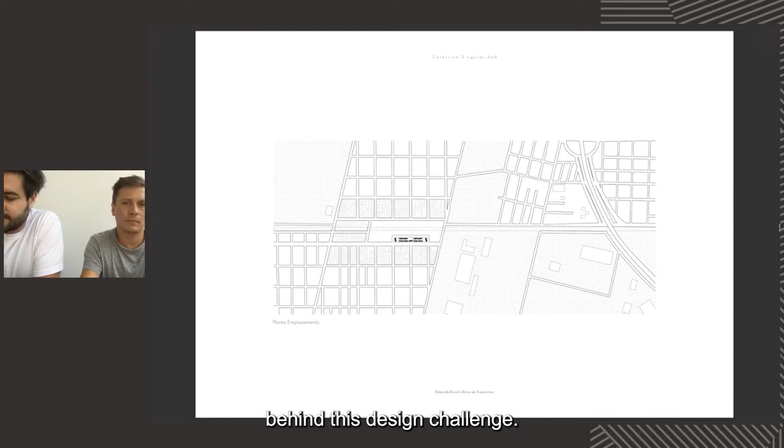To begin with, we consider it important to contextualize the circumstances behind this design challenge. For many years in Argentina, the possibility of obtaining mortgage loans was restricted, and in 2012, the creation of a trust fund called Procrear gave the possibility of access to housing through a loan with a term of 30 or 40 years. Procrear was an initiative that the national government promoted for the delivery of 100,000 mortgage loans to acquire dwellings that were built by the program through urban developments.

The program worked through national competitions, where construction companies, in order to participate, had to make not only an economic offer, but also a design proposal in each urban development. We were hired by a construction company to accomplish a proposal that, on the one hand, would be appealing for national judges, but on the other hand, had to be affordable enough for them to make a competitive offer. In other words, as architects, we were in between government expectations of forward-thinking designs and the company's economic efficiency philosophy.

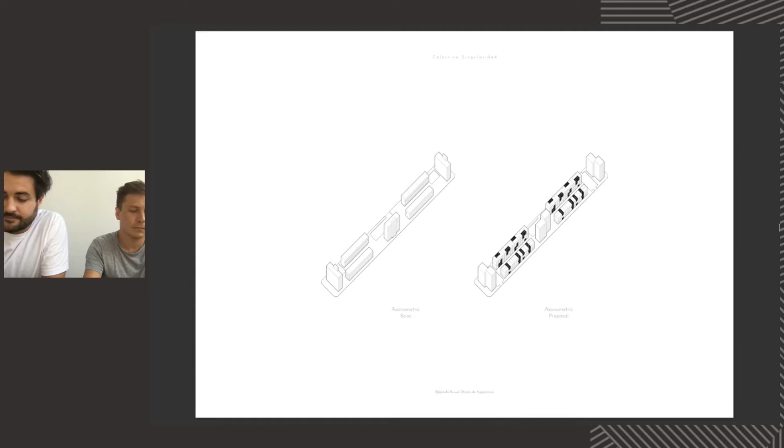Even though designing with a limited budget represented a challenge, the rules of this national contest were a major obstacle. The brief program designed basic sketches that defined a footprint that was not allowed to change. As designers, the possibility of proposing changes was not really clear, and we had to respect the amount of typologies, the units, the square meters, the amount of services such as bathrooms and kitchens, and well, all these matters were mandatory. The Baigorria project consists of 120 units split into 7 buildings.

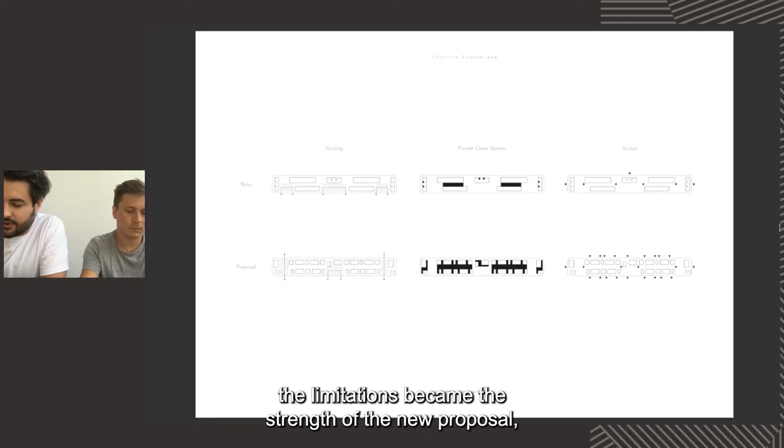From the beginning of the designing process, the limitations became the strength of the new proposal, and only justified variations were the ones that prevailed. Empty space became the main strategy of intervention. This operation was not necessarily more expensive, but would improve lots of variables taken into account in the design of each building. Perforation of the volumes would not only improve the space quality of the buildings, but also its relationship with the street. In a country such as Argentina, security considerations are always taken into account in the design process.

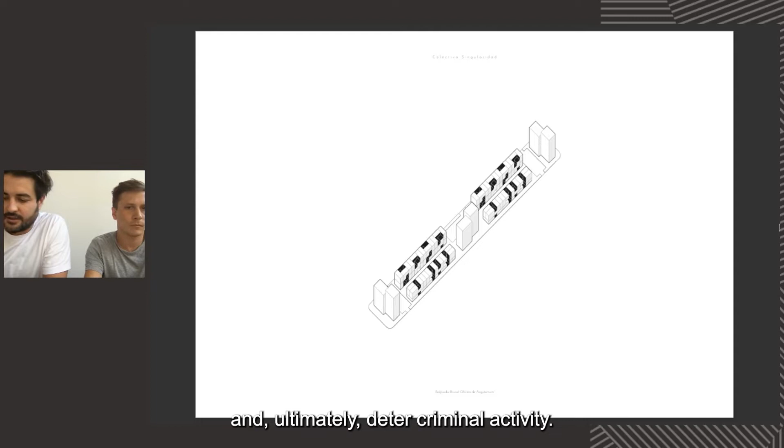In this case, by increasing the amount of entrances to the building compared to the brief base, the relationship with the street improved, as well as the neighborhood's security. These features allow residents to establish control over their private and community property and ultimately deter criminal activity.

The whole project is divided into 3 families of buildings. This includes ground floor plus 3-story building, ground floor plus 2 levels, and ground floor plus 7 levels. Each building was originally defined schematically in the brief base. Problems were identified in each building provided by the brief, but overcoming these mistakes became the starting point of our design proposal.

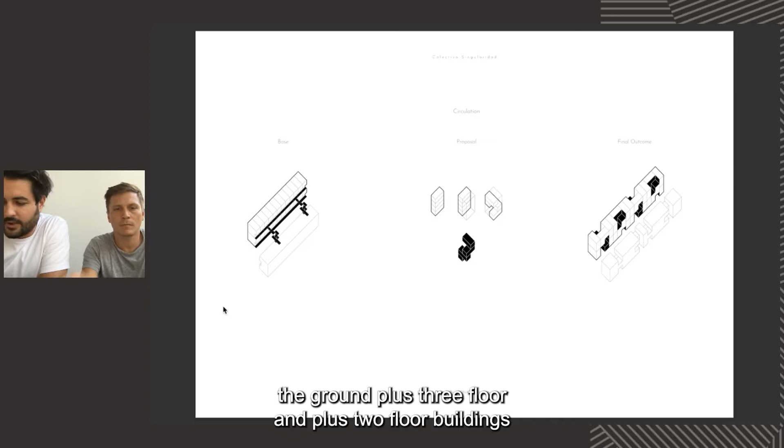In the lower buildings, the ground plus 3 floor and plus 2 floor buildings were identified. We identified the circulation as extremely inefficient. The distance from the main entrance to each unit was unacceptable for us.

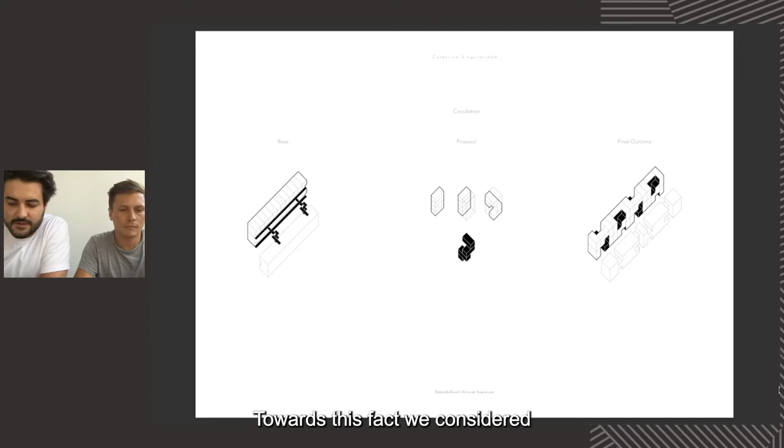In addition, the whole volume was combined with one duplex unit on top of another. This composition represented a contradiction, because we were supposed to provide a building with diversity of dwellings. In other words, the original conformation of the volume was the result of repeating the same unit.

Towards this fact, we considered that the diversity of apartments was essential, providing future inhabitants a sense of belonging and promoting individualism. This was ambitious, since every unit was supposed to have the same square meters and facilities. Facing this challenge, we concluded that by adding empty space volumes, different units with the same square meters could be created, completed through the circulations.

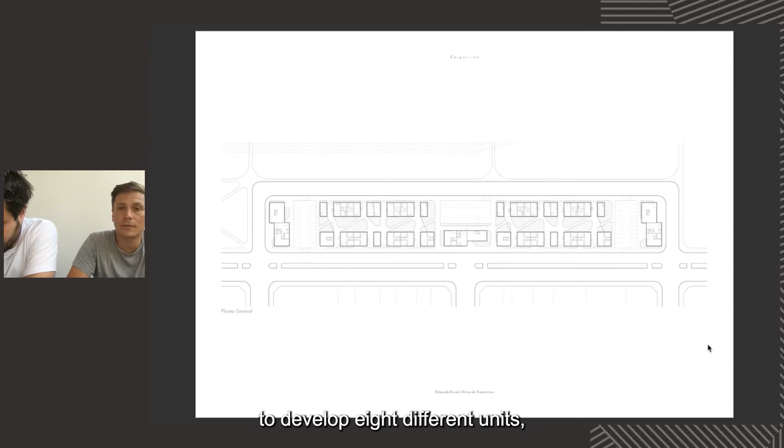This operation added a cross duplex as an alternative. Another variation in distribution was locating bedrooms sometimes on top and sometimes at entrance levels. This way, the proposal manages to develop 8 different units, compared to the only one given by the brief.

Another design strategy was paying special attention to the circulation stages. Open space was carefully thought out, gradually changing its scale along the way through the complex. A private exterior space was also provided in every unit.

In addition to this strategy, rational solutions were proposed to make the construction process more efficient. Every decision was thought out to be affordable. An example is the use of the same frame window for the whole intervention, as well as a module structure.

The open circulation was thought out to work as a common exterior space, where neighbors were expected to socialize and appropriate for their own personal use. We believe this kind of space makes the building breathe and provides extra exterior space for the unit, which is essentially small in terms of square meters.

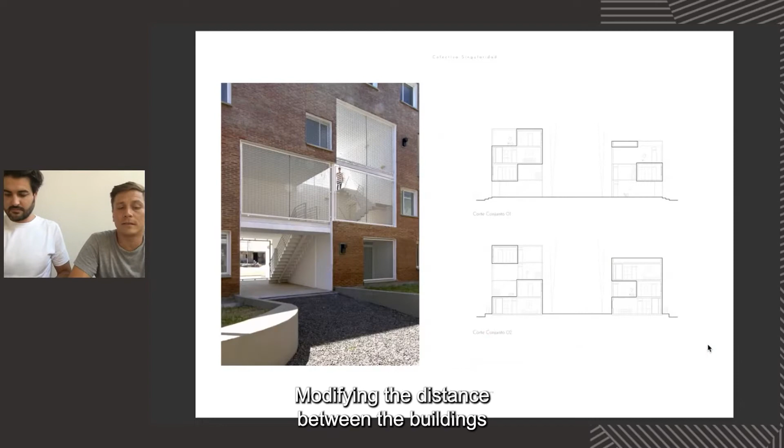Modifying the distance between the buildings was not allowed, but the perforations where the circulations take place make the central garden healthier in terms of illumination, ventilation and contact with the streets. Cross ventilation was also taken into account in the design of each unit. Each and every unit has it.

As Tomás said, kitchens and bathrooms are also the same in every unit, to make construction affordable. All of these design decisions had a great impact on reducing costs.

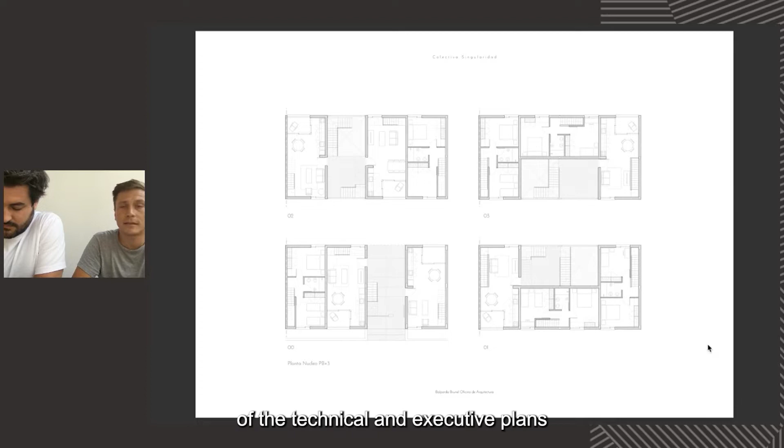Moreover, the whole building is completed by the repetition of the first 4 modules. This also made the development of the technical and executive plans more efficient.

Finally, the ground plus 7 floor building's original volume is wide and not high enough, so the plan is broken and shifted in order to improve the perspectives. The main challenge was to work this typology, embracing some of the solutions provided in the other, lower typologies.

In this case, the empty space was also added and placed in every floor of the circulation. This action improved the common space that generally lacks natural light and sights. The position of the balconies in each dwelling was also switched between floors to provide a wider range of typologies, so we added different types not only in the lower buildings, but also in the ground plus 7 ones.

Ultimately, our intention was to express an architecture which not only favored inhabitants, but also citizens, offering possible urban scenarios, understanding the residential project as the building of urban landscape.

For us, every obstacle, problem, and difficulty faced in the designing process has always been enriching. The idea behind every building has always appeared by trying to fix an apparent problem. Our architecture is proposed to improve not only living conditions in this kind of complex, but also to provide positive solutions to urban landscape surroundings.

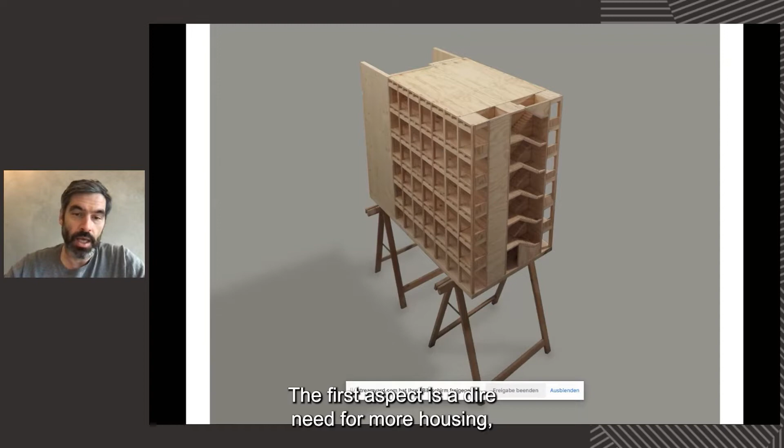And that doesn't come as a coincidence, because what is critical about the project from my perspective is the fact that we're trying to address 2 aspects that characterize the Berlin housing market that seem at first glance irreconcilable. The first aspect is a dire need for more housing, which by definition leads to the need for fast and cheap provision thereof, construction, which in turn implies very likely also serial construction, precast elements, and so on. And on the other hand, we're also facing an ever-widening range of ideas of how we live, how we work, how we share or combine these 2 aspects and facets of life.

And therefore, something that seems intuitively to go against the idea of pre-construction or seriality, which is the idea of a variety of plans, and therefore seems to contradict pre-construction and the uniformity that it seems to imply. This is exactly where that type of construction comes in, that we have appropriated from the world of industrial warehouses.

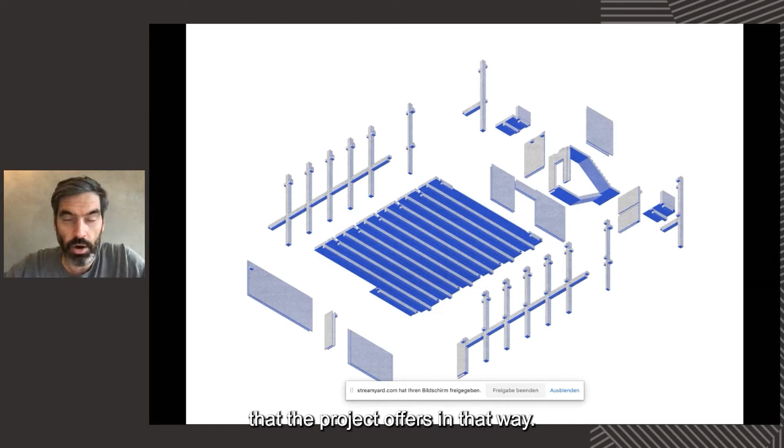So the same floor here in an exploded way, which probably makes it easier to detect the individual elements, columns, again, beams, and in the center of the drawing, the so-called TT ceilings.

I'll show you a couple of images of the construction process, as I do think they offer an idea of actually how it all comes together and what kind of freedoms the project and the way it is constructed offers at the end.

So you see at the very beginning, the first elements that have arrived, where the site of the project is an inner city site in Berlin. We're attaching the building on one side to an existing kind of block condition, the traditional kind of urban morphology of the city. But as you'll see on later images, it does not traditionally close the block, but actually leaves it partially open.

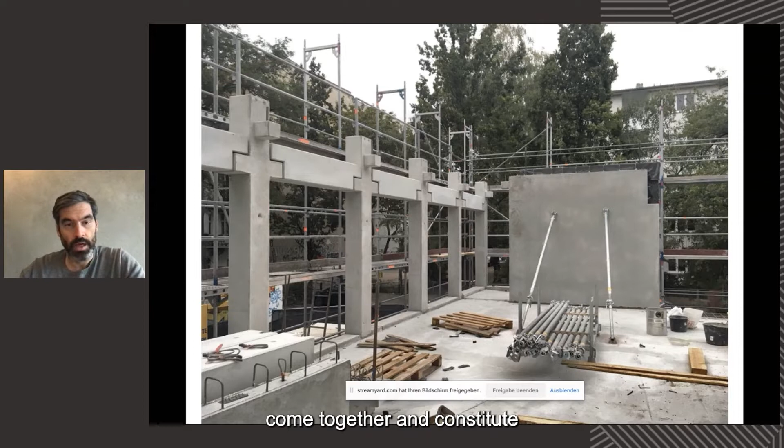What you see here is like somewhere halfway through construction. As I mentioned before, it's a 6-story building. Each floor was built within 1 week in terms of the structure, excluding the skin and the interior, the guts. But you see how these elements that I've introduced a couple of slides before come together and constitute the basic shelf as the Wohnregal, meaning the housing shelf. So we're looking at how these elements actually constitute that major shelf.

Here you see how they come together. And as I mentioned before, these are elements, and this is a construction methodology that's commonly used in industrial construction. The tolerances are bigger, the seams are wider. This is not as you would normally imagine, kind of architecturally, with a capital A, refined kind of structure. So there were a couple of aspects also of making it applicable to the idea of housing.

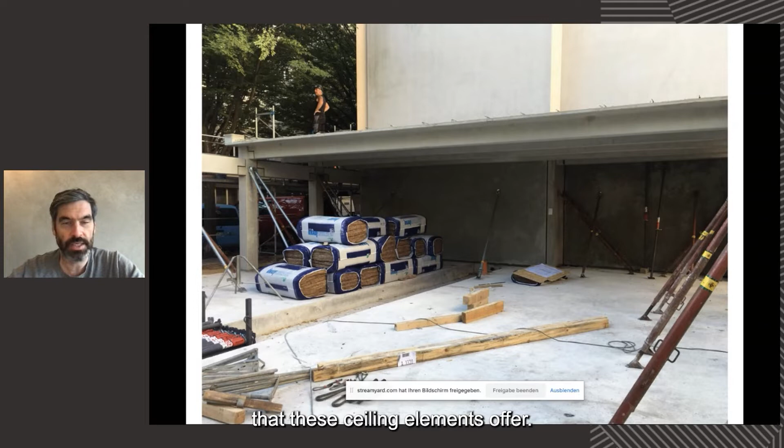I think this image is critical to introduce the idea of the freedom that this shelving, this prefab concrete shelving actually offers, because what comes to sight is the relatively large span that these ceiling elements offer. You can get a sense here in the photograph of the thinness of the actual ceiling itself in the very front, but also the downstands that are implied in these TT ceilings. And what is critical is that there is no structure supporting these ceilings in the interior of the house. So they span from facade to facade.

So that TT ceiling, or pi ceiling as it's called, is made up of a ceiling with two downstands, and those allow, for example in the instance of the Wohnregal, to span for 12 meters roughly, something that is with traditional means of construction not economically feasible. But now that we're able to do that, suddenly we gain a humongous amount of architectural freedom in terms of plans on the inside, because we do not have to align floor plans of the different levels.

So a photo from the factory where these pieces are being made.

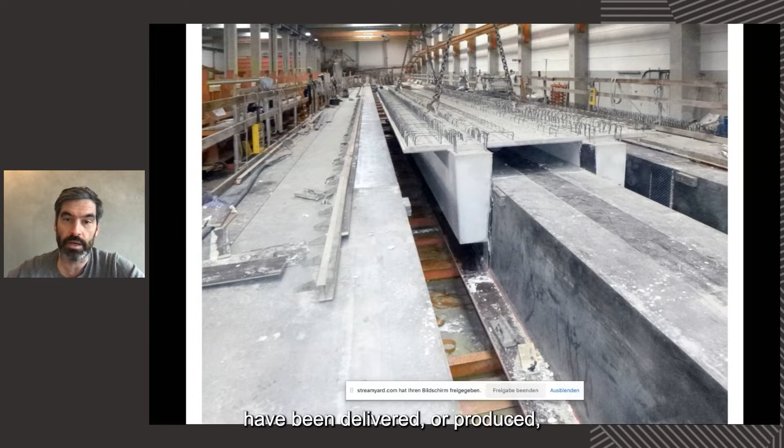It's somewhere in the vicinity of Berlin, an hour and a half from here. Some of these factories in the past have been places where large parts of the prefabrication of East German housing elements were produced, and they've developed onward from that, focusing on different types of pre-construction, like the one we're reappropriating now for housing.

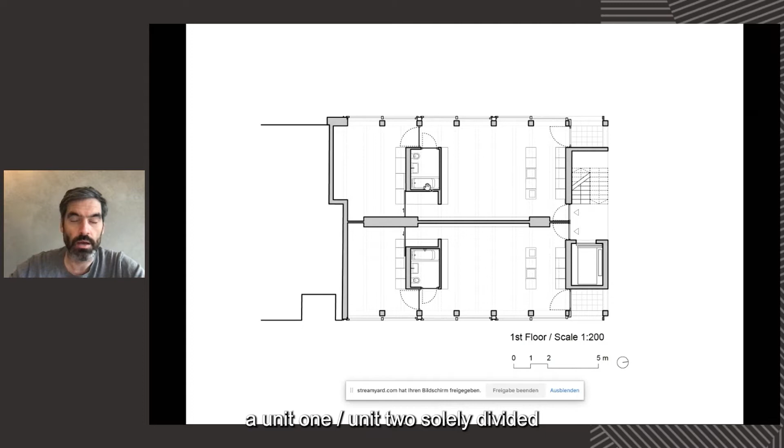So you see one unit which is largely open, almost like a single space plan. Unit 1, Unit 2, solely divided by one core containing a bathroom. On a different floor, one separates bedrooms, a potential second bedroom or workspace. We have one with an uneven division of the floor, with a relatively small studio space where the sleeping area is just separated by a curtain, multiple bedrooms and workspaces in the larger apartments, and yet another with a separate division of a small open plan studio and a relatively large scale open live-work atelier on the top half of the drawing.

The basic orientation is east-west here, so that all units have proper daylighting.

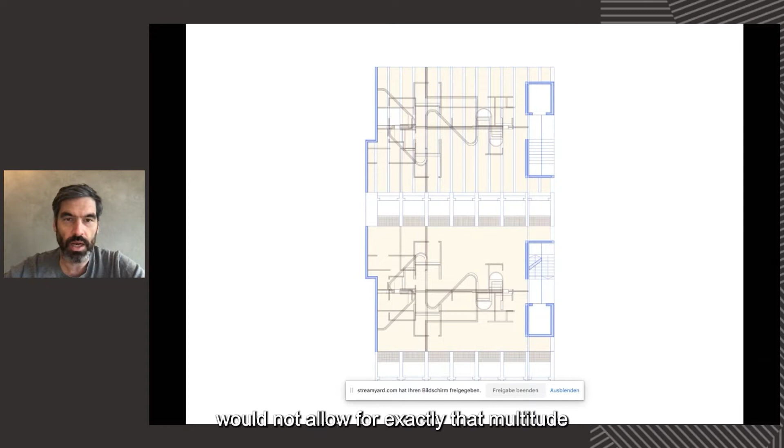Here is, I think, a drawing that is conceptually important for the project. It's an overlay, an unfold of the plan and a reflected ceiling plan on top, but it's an overlay of all the different plans of the different floors. That's something relatively unique to the project, as normally the rationale of building wouldn't allow for that multitude of different plans to be overlaid in that fashion.

I'll continue with a couple of photos to give you an idea of how it appears in built fashion. It is set in Berlin Moabit, an inner city part of Berlin, on a corner lot, taking the front of the block in a way, closing the corner.

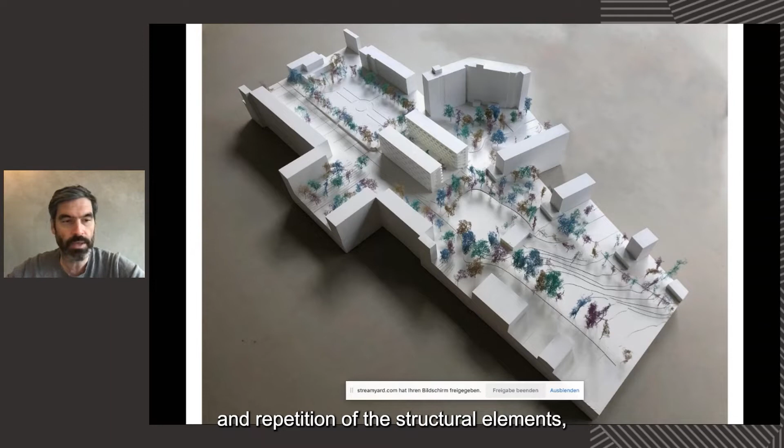What is implied in a serial construction logic is not only this idea of freedom within that building and the repetition of the structural elements, but it's also the repetition on a larger scale, the repetition of an approach that could be replicated on a different site at a different scale, because one should also consider that working in this way requires a lot of investment, not so much financially, but in terms of understanding the intricacies of a construction methodology of that sort. So it is an investment that almost demands that you think in terms of a replication.

So shortly after, or almost before we fully finished the Wohnregal project, we were approached by a German developer, Euroboden, and so we got together in the context of one other project, which has just currently started construction. And the interesting aspect about it is at first glance also the setting.

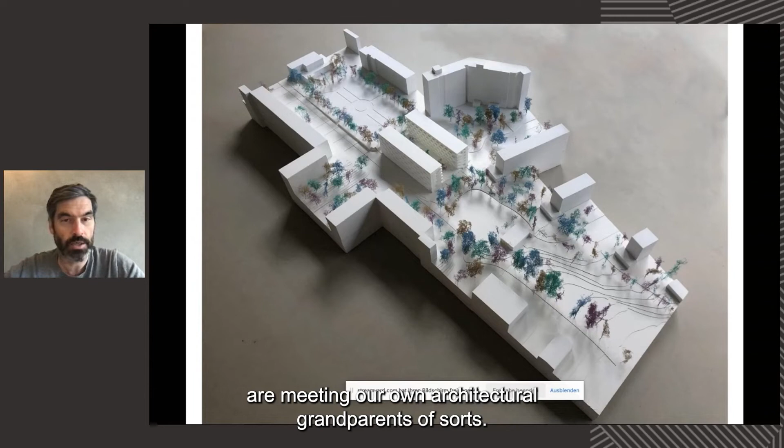The setting is in one of these large 70s, 80s East German housing estates, and they have been known for having been completely prefabricated at the time. So ultimately, in a certain way, one could argue that we, with our building, are meeting our own architectural grandparents of sorts. But that being said, I think it is important to point out not only that there's a historical lineage and a conceptual circle closing,

but at the same time, it's also critical to understand the huge conceptual difference from the historic idea of prefabrication from the 70s, 80s, because that form of prefabrication was built upon a series of wall elements that were stacked, and therefore the seriality would go hand in hand with the uniformity of plan. They were good floor plans, but they were a pure repetition of a few very limited options in terms of plans.

So the skeleton construction that we're not only proposing, but that we've realized and are now in the process of realizing a second time, goes exactly the opposite way, as it combines the idea of seriality with that of a large degree of freedom in terms of different plans and models of living and working.

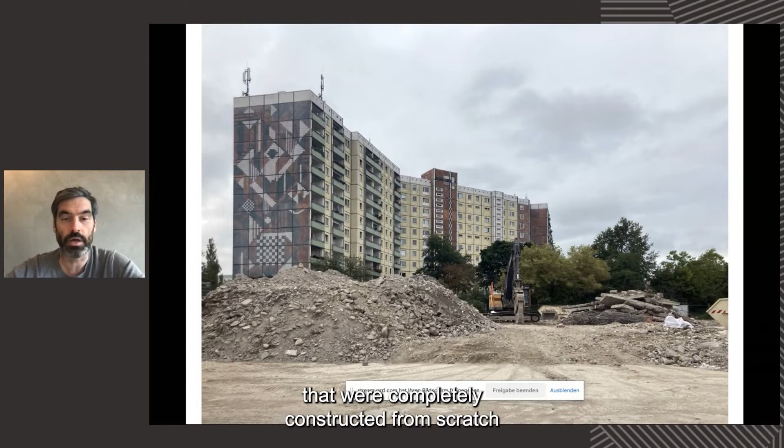So you see the actual site, you see what I just described, the surroundings being characterized by prefab housing, in this case from the early 80s, large scale residential areas that were completely constructed from scratch at that time due to the humongous shortage of housing that they were facing.

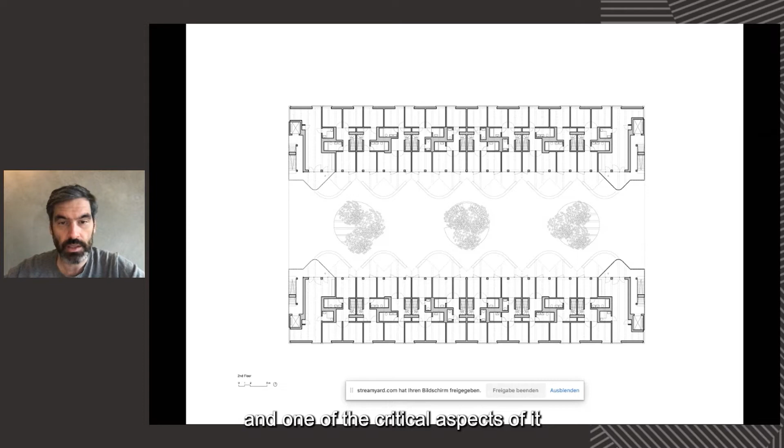Here you see the upper floors and the plan, and one of the critical aspects of it, and that you see in this rendering, is that in front of the facades there's not only the circulation, a type of gallery kind of circulation to enter the flats, but there's also a series of balconies, individual balconies for each of the apartments, and through that wave-like layout, they allow everybody, while being on the balcony, to visually connect outside that housing complex, to look out this way or the opposing way out of it.

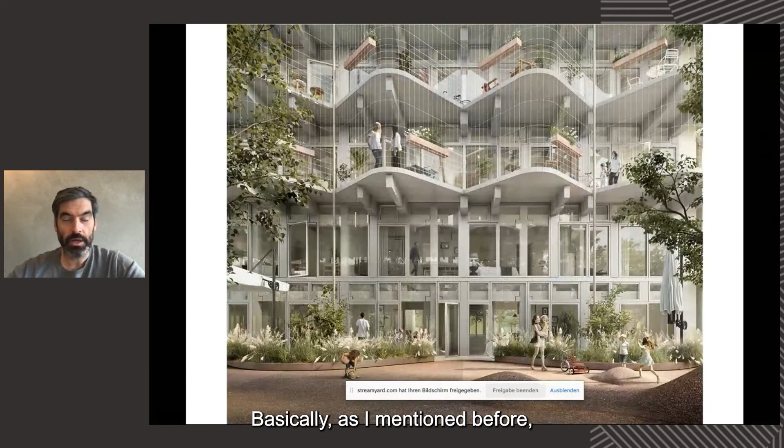So basically, as I mentioned before, this is a continuation in terms of developing the idea of the Wohnregal, various ideas in terms of the flexibility, the construction method, and all of these aspects that are implied in the Wohnregal, to develop them further on a different scale, in a different context. So this one has a little bit more than 120 units of varying scales, and again in a great variety, from two-story family-oriented units to very small scale for singles or people for live-work environments.

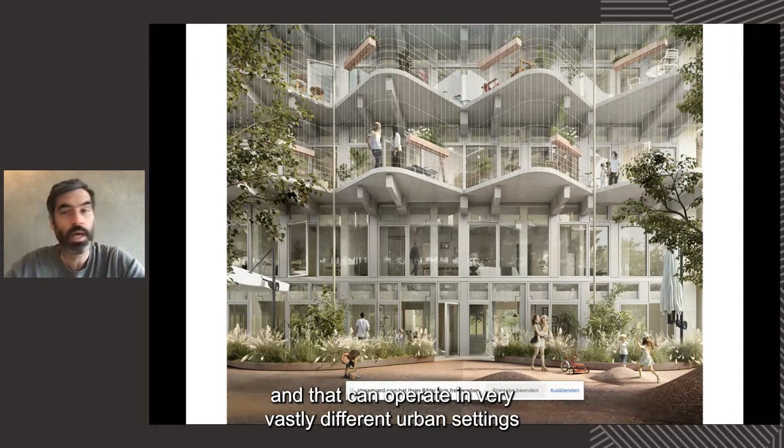So I do think it's, in my eyes, quite interesting to think of that not as a one-off in terms of architecture, but as an approach that can be developed further and that can operate in vastly different urban settings and on varying scales.

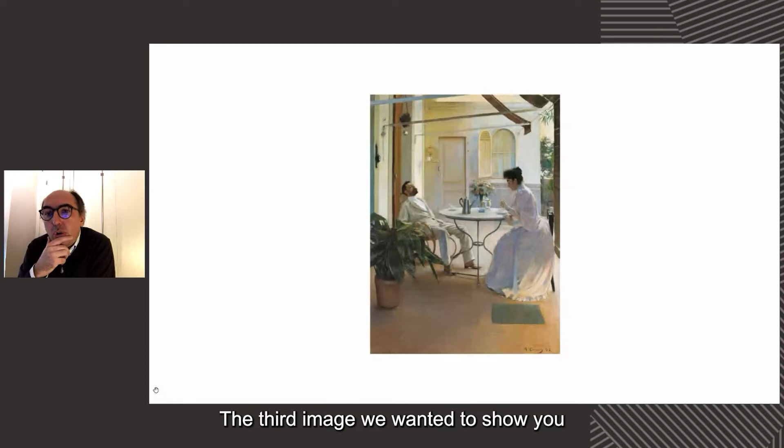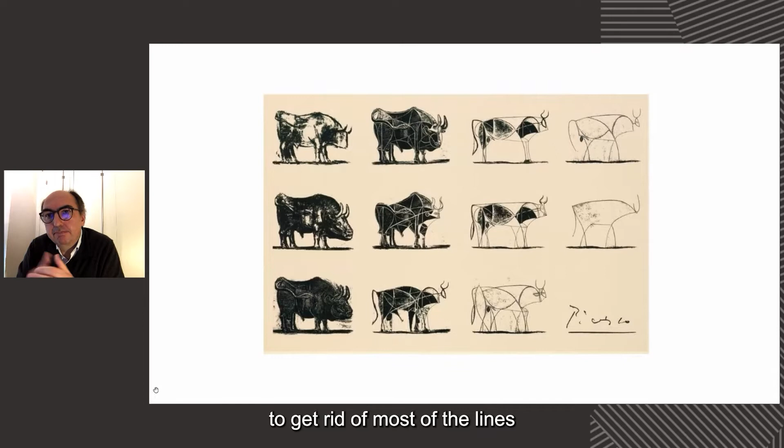The fourth image we wanted to show you is this image by Pablo Picasso that you might probably know, and it's now related to the design process. In these bull engravings, Pablo Picasso went through a process of, we could say, simplification, distillation in a way, decantation, in which he was able to get rid of most of the lines and to understand which were the fundamental lines that could explain the bull itself, the whole animal, with the minimum material.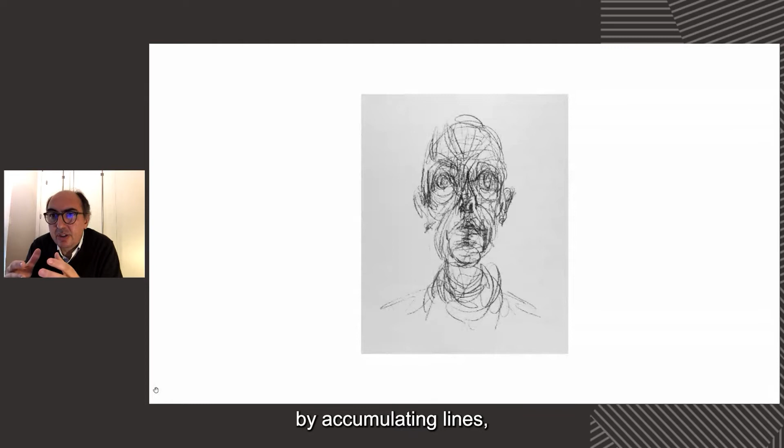So this process is of accumulating lots of lines, lots of data, lots of different materials and topics that somehow enrich the process and are at the end embedded in the final solution. This kind of portrait in which, by accumulating lines, trying to find the right one, the portrait just shows up, or it appears as a revelation of the most probable line after all the iterations.

This is also something related to the uses of architecture. We give a single answer to a problem that afterwards should be also adaptable to new conditions. So many different things should happen in the same place at the same time.

Finally, the sixth image of the 6x6 block that we would like to introduce is this contemporary artist that you will probably also know, which is Banksy. It's related to climate change, of course, and to our responsibility as architects related to the carbon footprint of our activity.

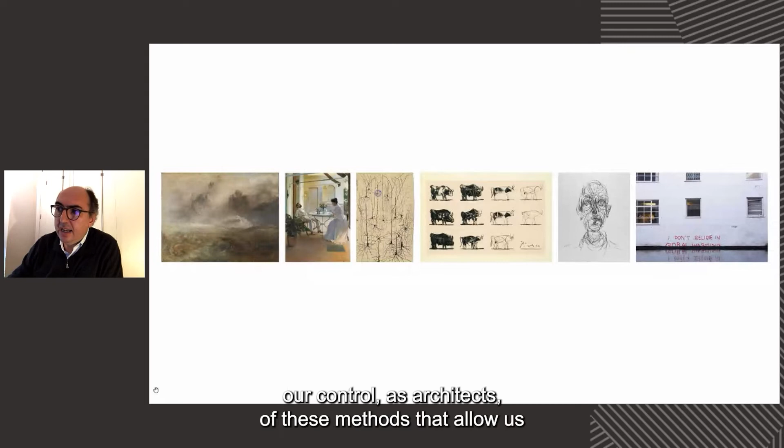Next slide, please. We can show these six images as the six topics that are somehow related to our work as architects, and especially in the 6x6 block, which are atmosphere from the, let's say, physical or scientific point of view, the cultural atmosphere of the spaces we make, our control as architects of these methods that allow us to achieve these particular conditions, simplification as a design process, accumulation of that, and finally this consciousness about our role in our duty to bring solutions to the climate change and to reduce the carbon footprint of our buildings.

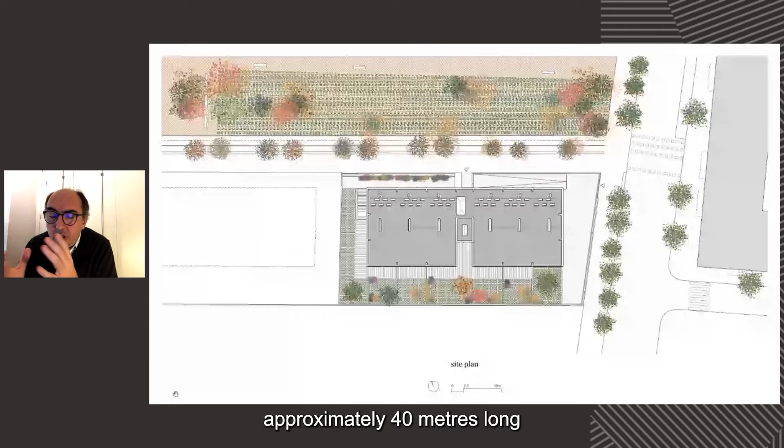And in the next slide we can see how this dense grid of both cities is somehow evolving into an open block area, plenty of public equipments like schools, hospitals, and so on. This is the site plan, somehow the roof plan, where we can see that it's a compact block due to urban regulations, approximately 40 meters long by 15 meters depth, with a very particular condition, which is facing south. You can see here the orientation.

An important thing about this site is that we have, of course, a great boiler, which is the sun. It's a nuclear boiler, in fact, facing south in the long facade of the building, and a green public area in the north, which can provide for some natural breath, a natural presence in the middle of the urban grid, and a natural access for pedestrians. So we have somehow nice surroundings despite being in the center of the city.

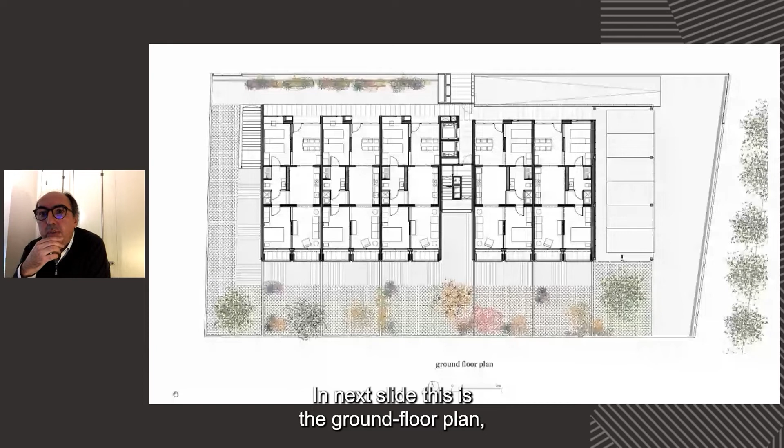This is the ground floor plan, but in the next slide we can see the typical floor plan that explains the central core of vertical communications and 2 different blocks of apartments that have cross ventilation and 2 different orientations, facing south and facing north, ground floor and 5 floors above that, so 6 stories of 6 apartments. That's the 6x6 name. That's the reason of it.

And a very important question: we wanted to, as I said before, reduce the carbon footprint of the operation. That's why we decided to act in 2 different directions. The first part is to somehow reduce the energy embedded in the construction process itself. That's why we decided to use CLT wood panels, timber panels, to build the whole structure of the building. And on the other hand, we try to reduce the energy demand that we need to achieve the thermal comfort conditions for the interior spaces.

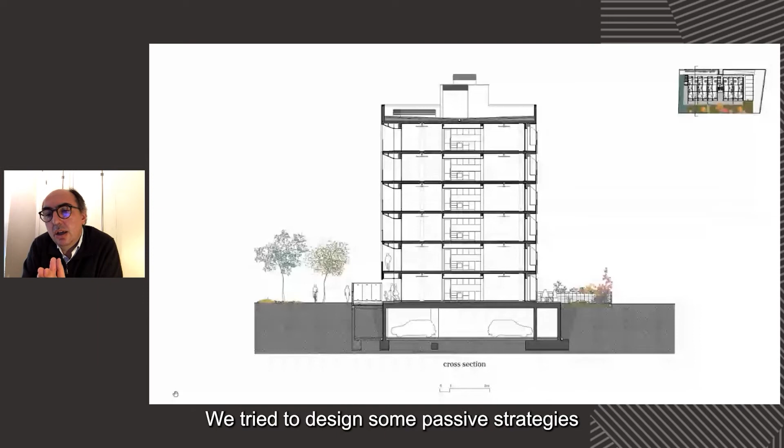Taking into consideration that we wanted to design a structure that itself was able to configure the spaces, and that we had a fantastic south orientation here in the northern hemisphere, as you know, we have the sun in the south orientation. We tried to design some passive strategies that could allow us to achieve the comfort conditions with no extra energy demand needed.

That's why all these apartments have this cross ventilation and an important facade facing south, so facing the sun, which will be our boiler, as you will see. And just by changing the air in different seasons in different parts of the building, we achieve the comfort conditions with no extra fuel, let's say.

That means that the south facade that you can see here is very important. It will act as a sun space, as a greenhouse in wintertime, and as a shaded terrace in summertime, which is the most important strategy that we used. And we can see in the next slide the cross-section of each one of the units of the apartments, how the performance works either in wintertime or in summertime.

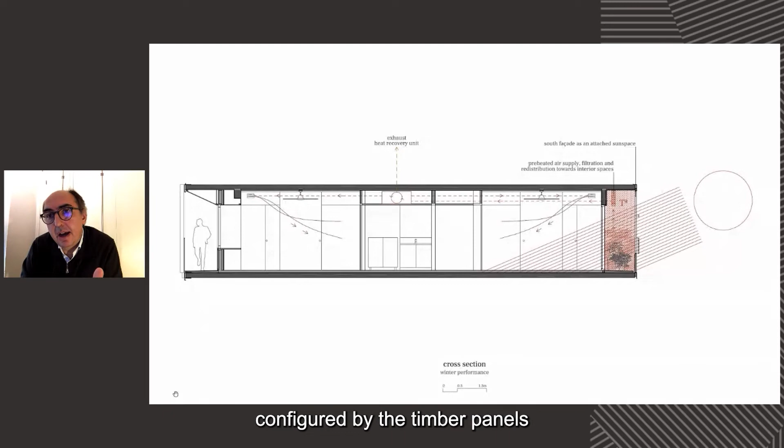This is the wintertime position. We have a central core of kitchens and bathrooms, and 4 different generic, let's say, rooms configured by the timber panels as load-bearing walls, and a south facade with this sun space that has a double enclosing of glass.

That allows us to naturally increase the temperature of this intermediate space, of this thick threshold, from 10 to 15 degrees. It means that this red air that you can see in this drawing is from 10 to 15 degrees higher than the outdoor air. And just by introducing this air, this inlet system of air from this naturally preheated air, we achieve the thermal conditions in the interior spaces. And in the next slide, we can see the performance in summertime.

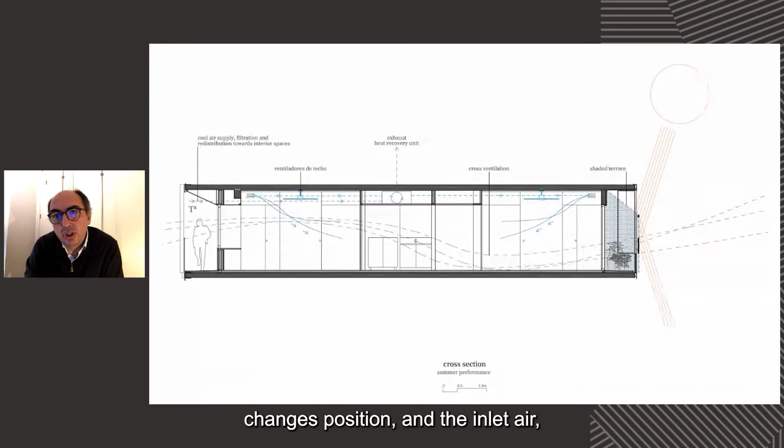This heat recovery unit that is in the central core of the bathrooms changes the position, and the inlet air, instead of being taken from the south facade, is taken from the north facade, so fresh air is introduced in the interior spaces, and we achieve these thermal conditions. In this summer season position, the gallery in the south facade is configured as a shaded terrace with some traditional wooden shades that you will see in an open position.

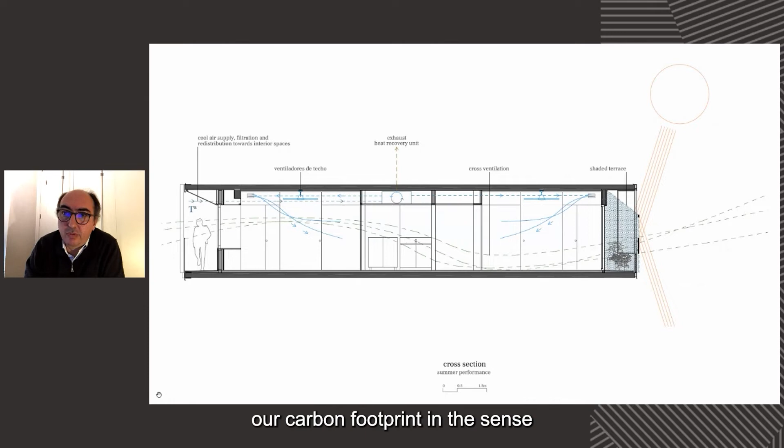So this passive strategy based on preheating or pre-cooling the interior generic spaces by introducing the air from these thresholds, both on the north facade in the summertime or on the south facade in the wintertime, built with CLT, should allow us to reduce in an important way our carbon footprint, in the sense that we are reducing the energy embedded in the construction. As you know, timber can fix CO2.

Due to photosynthesis, the trees are absorbing carbon dioxide and transforming it into wood and into oxygen. So until we somehow burn these approximately 1,000 tons of wood that we have in the building, we have 1,000 tons of CO2 fixed in that place. And the energy demand is reduced through these passive strategies that, of course, are supplemented by the natural cross ventilation of both opposite facades.

So one of the key things of this system was to design these galleries as a sun space in wintertime and a shaded terrace in summertime. And here comes to light another thing that is important for us, related to this 6x6 block. Somehow we could say that this exercise, the design of the 6x6 block, tries to get to points between

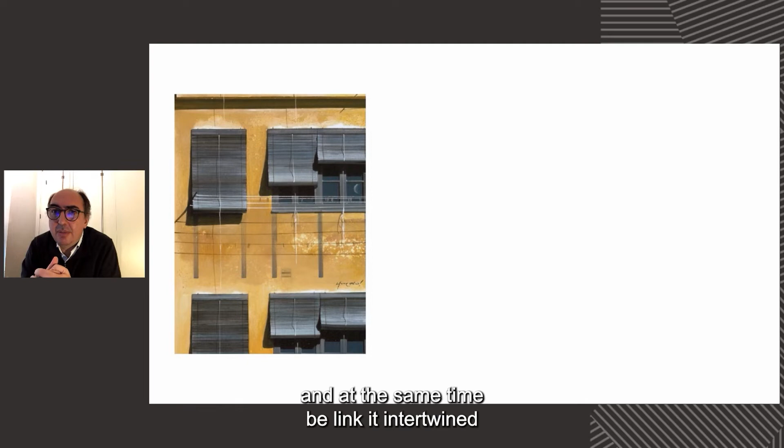what are apparently some dichotomies: how can we increase density in our cities and at the same time be sustainable? How can we build what we can consider a prototype and at the same time link it, intertwined with the history and the traditions of the site? Or how do we deal with these very scientific and parametric aspects of the project, and provide comfortable spiritual spaces? I explain this because this image explains somehow the origin of the design of these galleries.

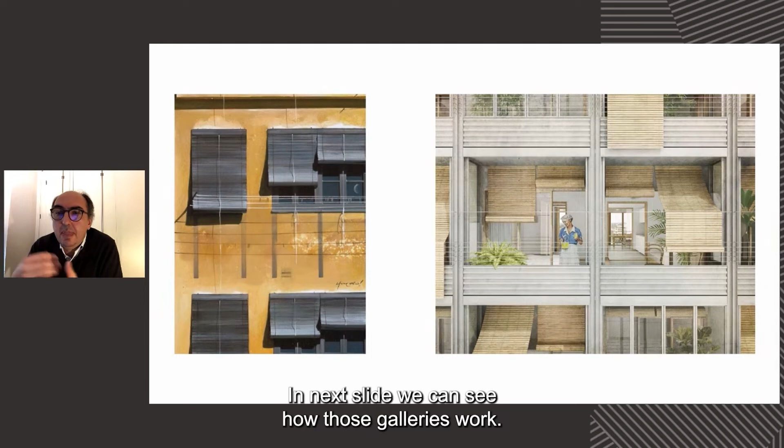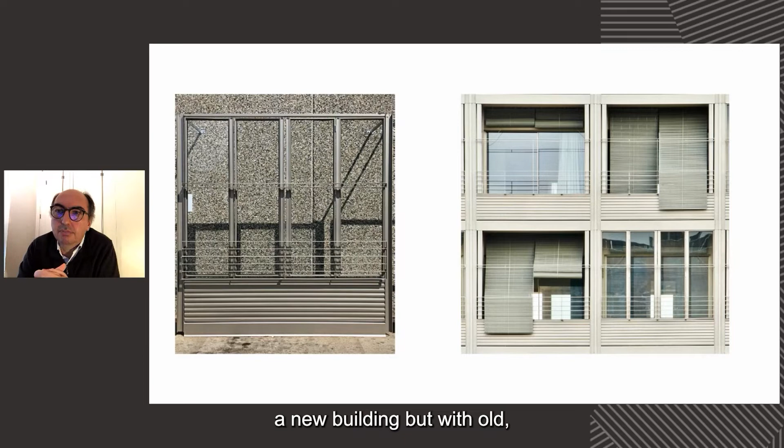And in the next slide, we can see how with local enterprises we were able to produce some mock-ups and to evolve these solutions into contemporary solutions. Like in the next slide, where we can see how all these patterns were afterwards in the final design of the building as contemporary galleries, a new building, but with old patterns and styles. In the next slide, we can see at the end each one of the units.

As you could see, we somehow bet on flexibility. We think that flexibility is very important in our buildings, especially in residential buildings.

That means flexibility to the exterior and to the interior. We can see how the building itself, by its skin, is changing and adapting to different seasonal or climatic conditions. But again, in the interior, we would like to give a generic structure with generic rooms able to host whatever is related to dwelling or other uses. That means flexibility during time, so those spaces should be able to be configured in different ways, and the shifting needs of the inhabitants shouldn't be a problem to incorporate in the same design.

Here we have the apartment units empty with the central core of bathroom and kitchen. The access is through corridors in the north facade and galleries in the south facade on the right-hand side. These four generic rooms in both facades are ready to be connected with sliding door systems or separated, allowing for different configurations.

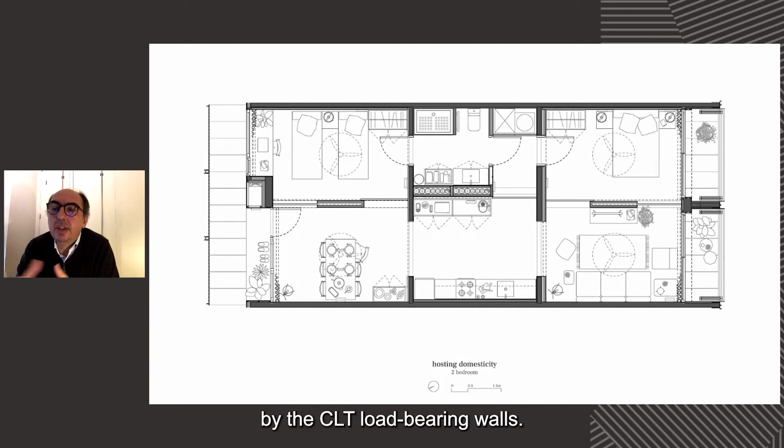For example, in the next slide we can see the same apartment configured with a one-bedroom program with access to dining, kitchen and living, with the day zone and the night area on top. In the next slide, we see it configured as a two-bedroom unit, with no need for more works, just by using furniture in different ways in the same spaces configured by the CLT load-bearing walls. Next slide shows the same apartment in a three-bedroom configuration.

Or, for example, not only hosting the domesticity but also the extraordinary. In these relatively small apartments of 70 square meters, you can even have a celebration or dinner for 30 people just by moving the sofa, or other extraordinary uses like a slot car racing championship. Beside the joke, this picture shows how the number of doors, meaning communication between rooms, allows for more flexibility, since each room has at least three different connections with the rooms beside it.

Or other extraordinary uses like this pop-up pastry dinner, where you have the intimate spaces in the south facade, and the north facade can be open on weekends, for example, to share with the community or the rest of the people of the block or the city as a pastry atelier or other activities, while keeping the intimacy in the south facade.

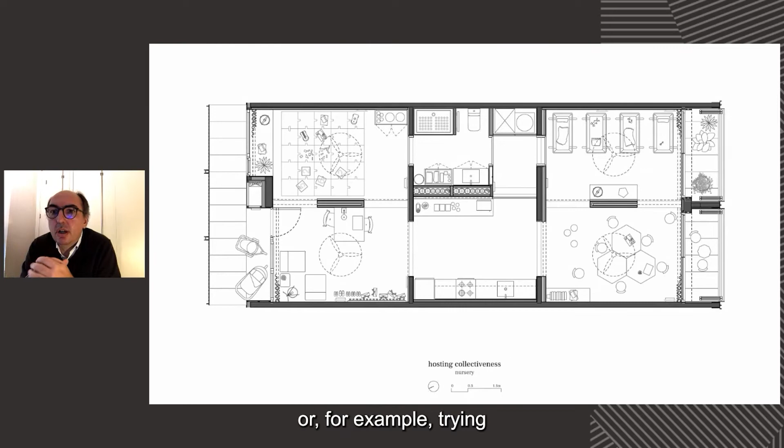Or, for example, trying to use the same generic spaces for collective uses. So apart from the dwelling units in the block, the inhabitants of this building can share communal spaces with different uses in each one of the units.

For example, a nursery or kindergarten in one of the units, or other collective uses like a canteen with 40 people to eat in the space with the kitchen, or co-working spaces, or, as in the next slide, a gym ready to be used by the inhabitants of the block.

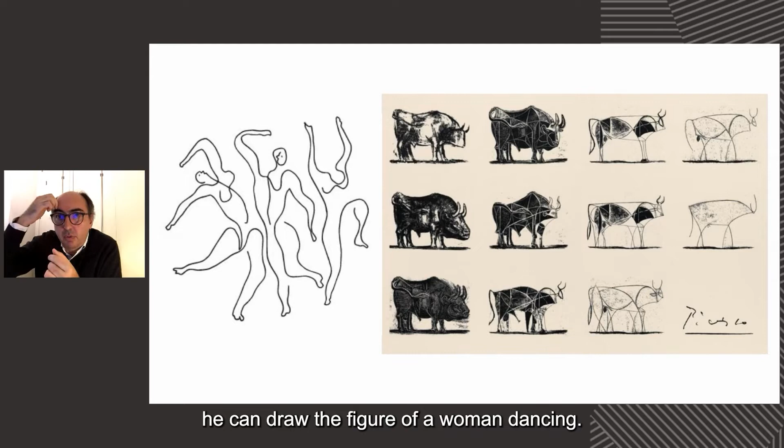So this interior flexibility achieves hybrid uses in the same building with just one same answer. We can see this Picasso strategy of simplification, of decantation, that brings him to the point where with only one line he can draw the figure of a woman dancing, which is somehow what we try to do with the building: finding the fewest elements to achieve the most complete performance, the fewest lines to achieve the most complete building we can.

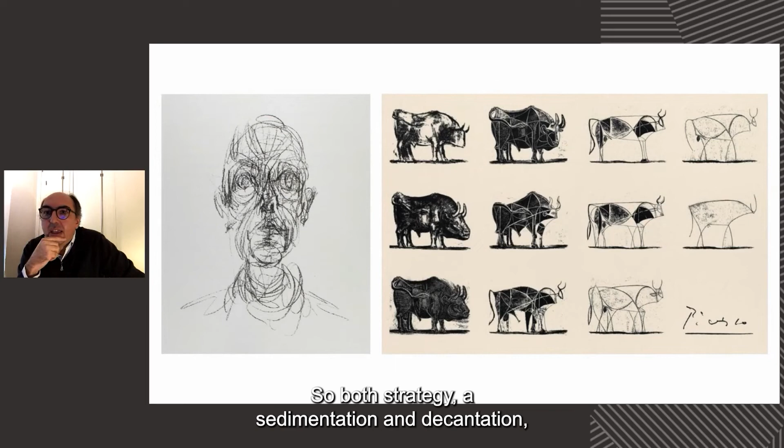On the other hand, the Giacometti sedimentation process is somehow achieved differently. In the next slide, we see how the accumulation of lines allows the figure to appear, to come back to light. Like in our building, all the superimposition of new uses brings this complexity to the simplification we previously designed as a structure. So both strategies, sedimentation and decantation, are processes to achieve the simplest structure for the greatest number of possible uses. So simplification allows for complexity.

Here we can see the building under construction, this big cabinet made out of timber with a grid of load-bearing walls and bracing walls that configure the spaces, generic spaces themselves. So the whole image of the structure is the addition of cells that configure both the structure and the spaces.

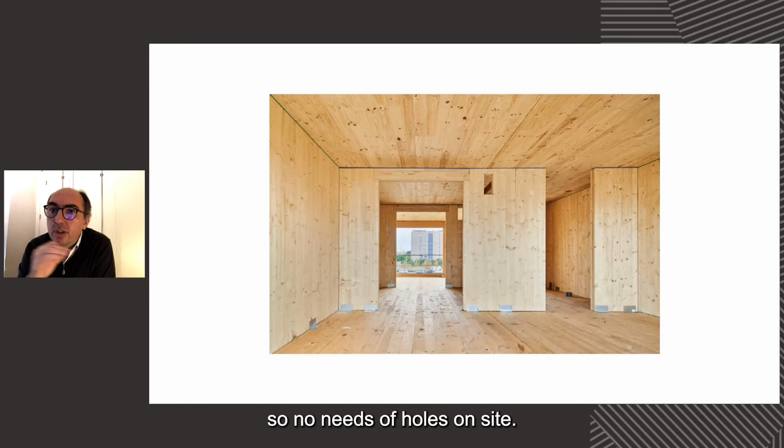Somehow all the benefits of industrialized buildings also allow us to pre-dimension and prefab all the holes, and the services go through in factories, so there's no need for holes on site.

All these enfilades of spaces from north to south, the north corridor access facing the green area, and this is the finished building. Again, the green area, public area, and the street that goes above along the building to bring access to all the units on the north facade.

A very transparent and permeable facade from the building to the exterior, while quite an intimate facade going through with some reverberations of the neighborhood.

The access from the public area, and the south facade as the crux of everything, this skin that somehow is expressing what's visible but also what's invisible, so the season, the movement of air, and the temperature, the thermodynamics of the behavior of the building itself.

This facade can be configured as a sun space, as you can see with this glazed facade, or as a shaded terrace with these persianas, these wooden typical traditional shades. So here we can see what should be the configuration in wintertime as a sun space, preheating the air, and as a summer space during summer as a shaded terrace.

And here we can see a slide where we can compare both conditions of the same facade in wintertime or in summertime.

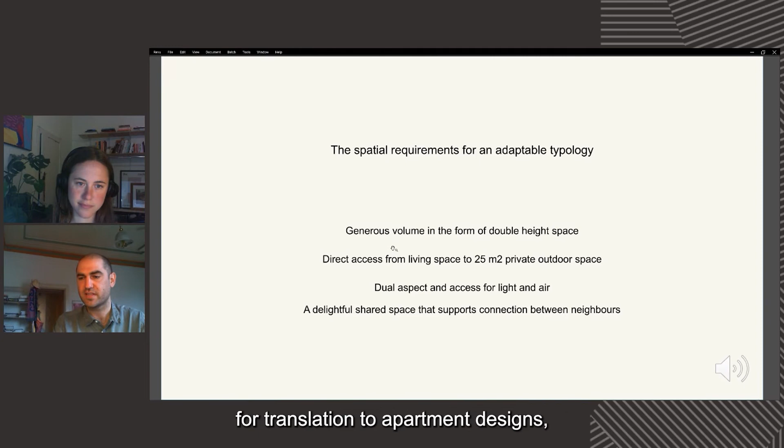We began developing our design through the crystallization of a selection of core principles that we feel imbue the qualities of a single household home in the suburbs, for translation to apartment designs, hopefully maximising the appeal of medium density housing within the typical suburban Australian psyche.

Firstly, we offer spatial generosity in the form of double height ceilings, providing a sense of escape that the suburbs offer and people don't think of with apartments.

Secondly, we're locking in direct access from living spaces to 25 square metres of private open space, and as many of those private open spaces to be located on the ground floor if possible.

Thirdly, ensuring dual aspect apartments for access to light and air, often with 2 points of entry to enhance the free sense of movement facilitated by detached houses in the suburbs.

And then also providing shared space as part of public realm and street. So an incidental social space that is part of pedestrian and vehicle movement through the site, rather than space being programmed as such.

We started our design process by embedding these core objectives or principles that Andre has mentioned, starting with the basic unit of a double height living space, on the left, that connects directly to an outdoor space, and that to be combined with any number of bedroom and bathroom units. That essentially being the basis for creating from a studio up to a 4-bedroom unit.

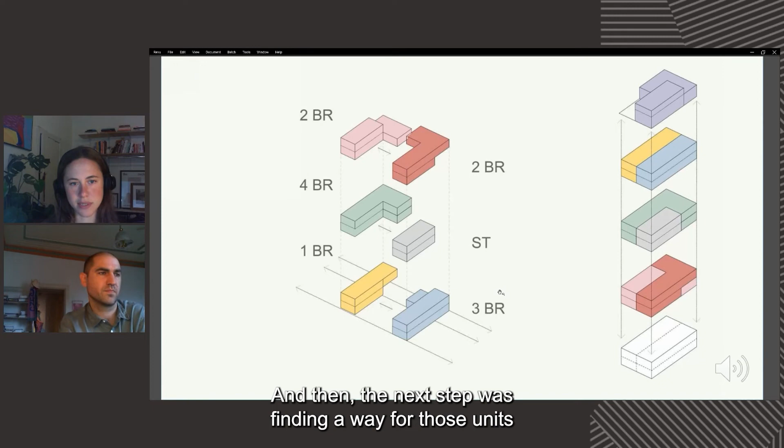And then the next step was finding a way for those units to be combined and work together. So we came up with this unique kind of interlocking arrangement that allows for every 2 bays of this structural grid to be interchanged with, say, a 2 and a 2-bedder, or a studio and a 4-bedder, or a 1 and a 3.

That was about finding a really flexible and adaptable kind of bones for the building that could enable different dwelling mixes for different demographics and for different briefs. Just embedding that sort of adaptive flexibility.

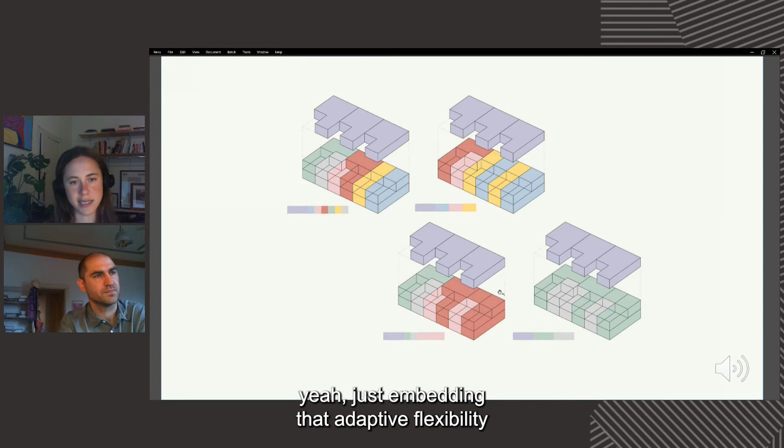And then that essentially forming a logic for a linear typology that can be extended or cut or rotated to suit any different site.

And then with that sort of adaptable logic, I guess the next steps were around identifying a key set of steps to make this proposal work on your typical suburban block. So we were specifically looking at blocks in the north-south orientation and the east-west orientation.

And so defining a series of moves to be implemented. So the first of those being obviously a consolidation of suburban blocks. The second being to reduce the footprint to the minimum and build to the maximum height of 3 stories.

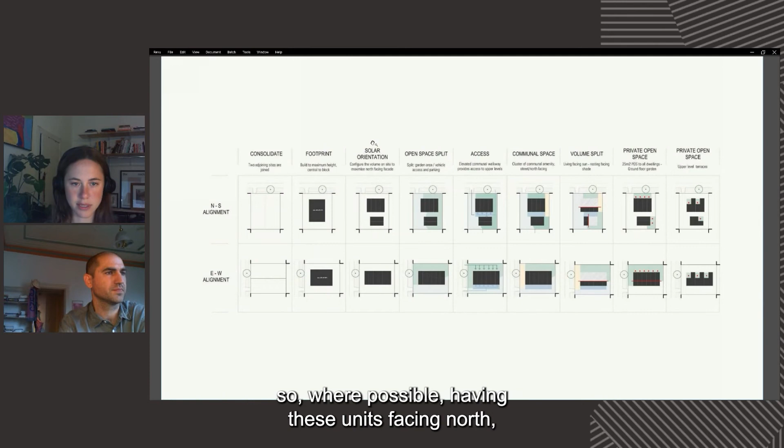The third step being to maximize the orientation towards the north, so where possible, having these units facing north, just to maximize solar gain and thermal efficiency.

And then fourth, being quite clear about the split of vegetated permeable surfaces and gardens consolidated to one side of the site, and the vehicle and access to the other side, creating quite a clear distinction between those 2 access points.

And then introducing a communal space through the thoroughfare through the access point to the building. As Andre mentioned, sort of an incidental space.

And then splitting up that volume so that the living spaces are facing north and the bedrooms to the back, just having that dual facade condition.

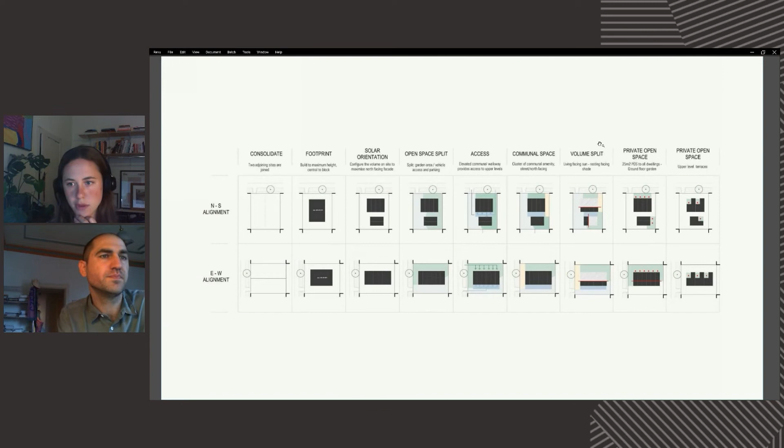And then obviously those living spaces opening out onto that 25 square meters of private open space for everyone, either on the ground floor or for the top level units, to a generous rooftop courtyard terrace.

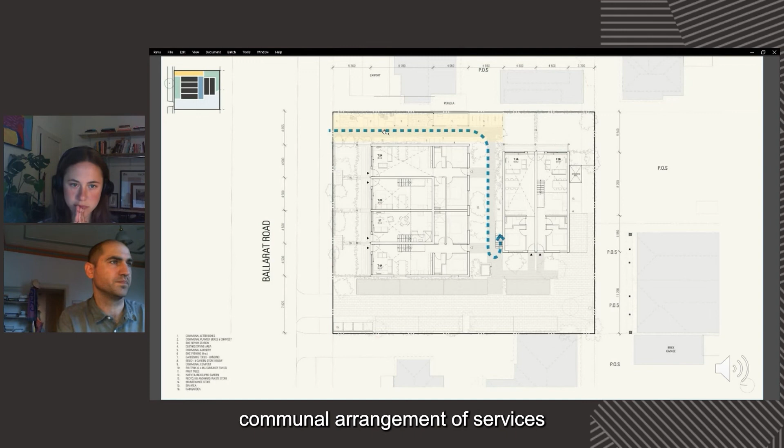And yes, what we're showing here is the other side of the site, and that prioritization of consolidated green space and deep soil that's given over to the private gardens. And then this entryway communal arrangement of services along the side boundary that's on the pedestrian's journey to their door, which is, if we go to the next slide, being imagined as a series of functions that residents require in their daily life.

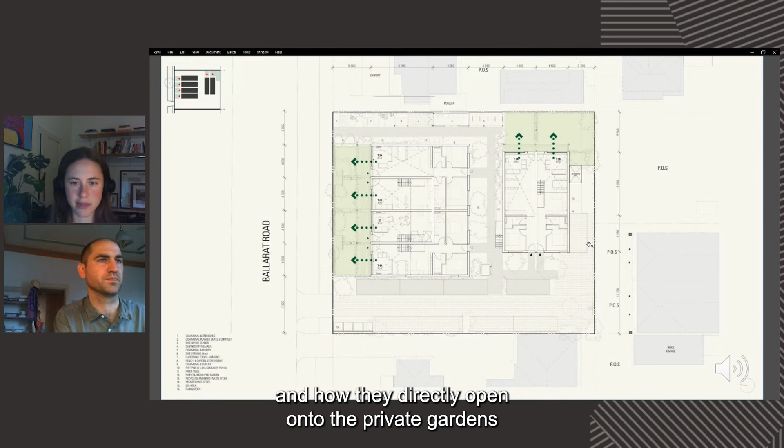So the communal laundry and the clothes hanging and the bike workshop and a productive garden, and just creating a moment for residents to pass by each other while doing daily functions. And shown in green here are those double height living spaces, where possible oriented to the north and where we couldn't oriented to the east, and how they directly open onto the private gardens, so that seamless connection that we spoke about in the beginning.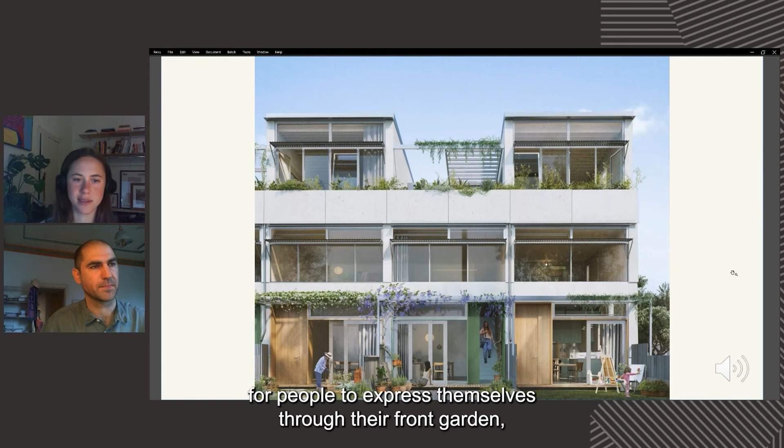And this is just showing the north facing street interface for those dwellings, and trying to capture as well the individuality of each resident, and how we've enabled that expression to come through with these pergolas and small intermediary elements, for people to claim and make their own, and for that expression also to be facing onto the street, in the same way that the suburbs are a format for people to express themselves through their front garden. This was about trying to make that possible, and a townhouse terrace expression rather than one big apartment.

And moving inside, just showing that double height living space and the abundance of natural light and the quality that brings to the living space, but also the opportunity for that blank canvas to be something that residents can animate, like hang a surfboard on the wall, to make their own space, which is something we've felt is really important to instill even in apartment living.

And looking in the other direction, seeing the possibility for that mezzanine space to also be a working from home space, and also baked into the structure the possibility for that mezzanine to be built out in the future. It's just another layer of adaptability. And just looking at the first floor, you can see the generous void spaces over the living space.

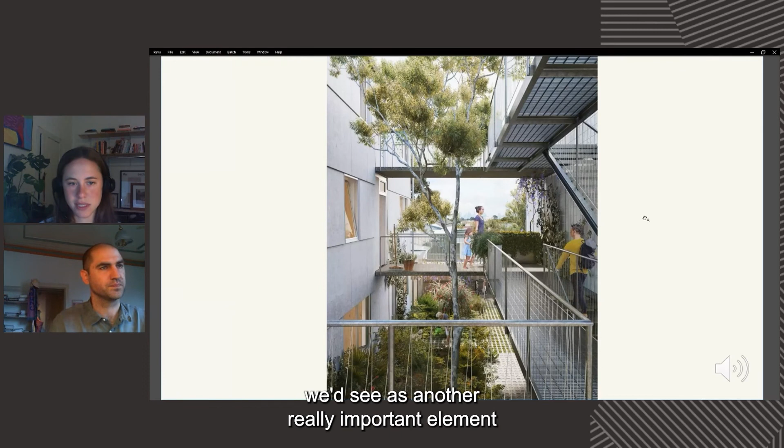And another really central part tying the scheme together is the access to the building at the upper levels. So this bridge that we've conceptualized between the two buildings, we see as another really important element to bring residents together, to make it a really beautiful space that is pulled away from the building for privacy, that creates this deep soil zone for vegetation to grow through and create more privacy, but also to make it a really special entry to the back door.

And on the top floor, obviously where the ground floor garden isn't possible, we've chosen to create really special open to the sky terraces that are enclosed as an outdoor room. And just showing that type of space here where you have a really wide view into the horizon and a great outlook. So it's got a different quality to the ground floor double height typologies.

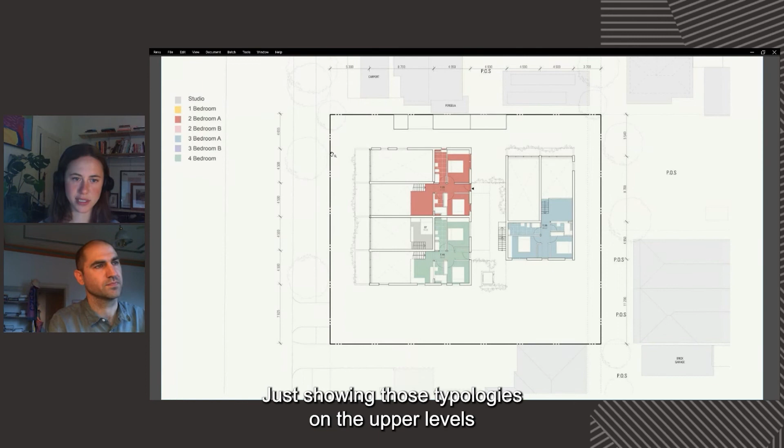And just showing the dwelling mix. So it was not only part of the brief, but really important to us to have the full spectrum of bedroom types, from a studio to a 4-bedder. And I guess the challenge is accommodating that within a really structured and repetitive grid, standardized structure and grid. Just showing those typologies on the upper levels, and the top floor, the three bedrooms.

And just showing the scheme in its context. I guess the main thing to see here is the generous setbacks from all sides. So whilst we are being quite a tall and proud 3-story building, it's an important part of the scheme to have a lot of open space around, to create a generous enough space for greenery to grow, to be a buffer to neighbouring developments.

And for the landscape, on the scheme we worked with Openwork, stage 2, and so I guess the landscape has been a lot about trying to make the open air driveway, which isn't under the building but out in the open, as usable and friendly as possible, with lots of green planting and shade, and the basketball court, just to give it more usability, and then the private gardens, obviously, for the residents

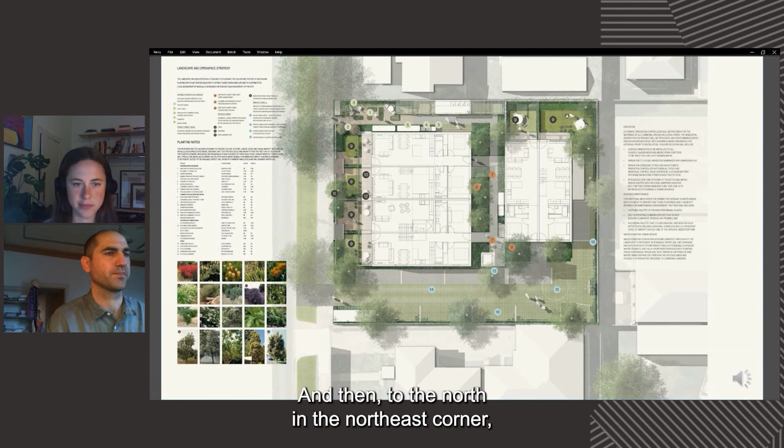to create their own gardens. And then to the north, in that northeast corner, a small productive garden that faces onto the street and catches the north sun. And then, as I mentioned, in between the two buildings, this really ferny forest walk, we called it, which is shade-loving plants and a really lush passageway between the buildings.

And I guess going a step further in terms of siting, we also looked at the possibility for this typology to work on 2 or 3 or 4 lots in different orientations, and just kind of proving the flexibility of such a basic linear module and the ability to reorientate.

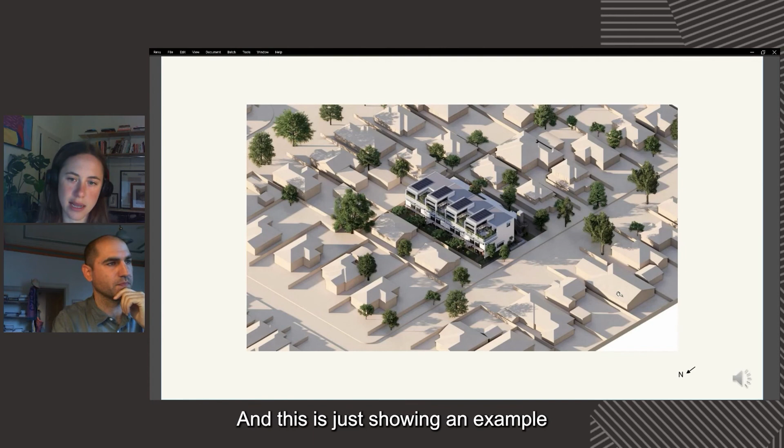This is just showing an example of an east-west oriented site, so all of the volumes facing north away from the street. And then next page. And then as we developed it for the Braybrook competition, with the north to the street, and a rotated rear volume. So just showing those 2 key orientations.

And sustainability would have been embedded in the siting of the design, just in the prioritization of orienting towards the north to capture that solar gain. But we've also worked with Finding Infinity to develop and optimize a number of initiatives to reduce our energy, water, as well as our waste. And of course, the embodied energy through the use of timber.

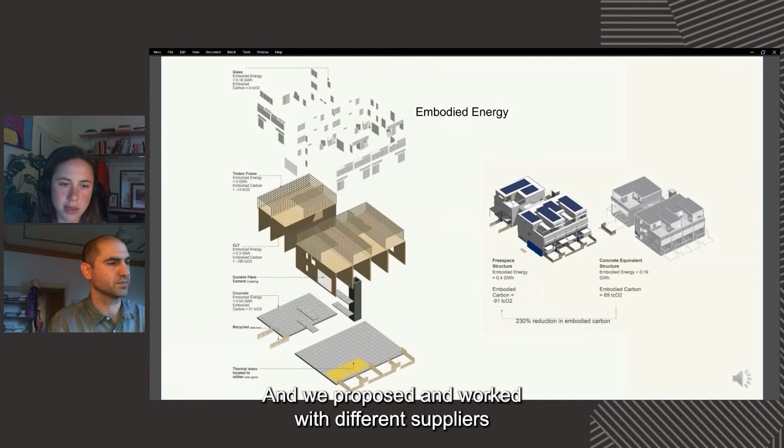And we proposed and worked with different suppliers to develop a cross-laminated timber ground 1, level 2 structure, and lightweight on top. And this was just a study showing the net benefit of building with timber instead of concrete, and the reduction in embodied carbon.

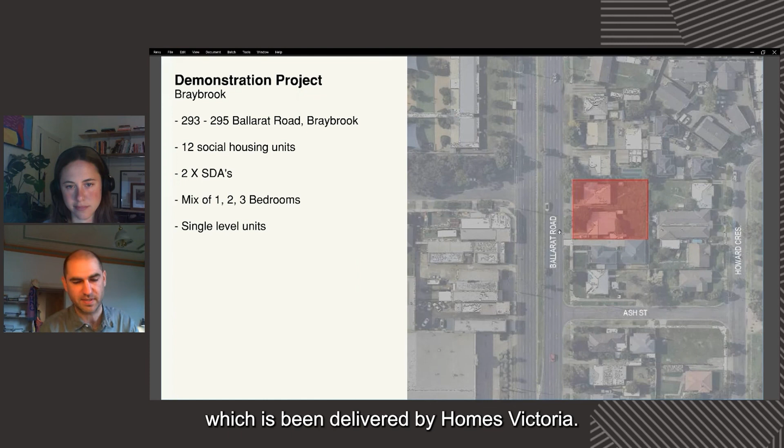And so, as well as the adaptation of that competition design for the planning scheme, we've also tended to deliver an adaptation of the design as a public housing project, which is being delivered by Homes Victoria. And we're currently in the planning process at the moment, getting that through.

And the brief is, I guess, from the beginning, as a public housing project, it had a different brief and different constraints from the Department of Housing. So we instantly had to adapt our scheme. Some of the brief requirements were for 12 social housing units. They had a specific mix of 1, 2, and 3 bedroom units. We had to have 2 SDAs, so specialist disability accommodation on the ground floor. And then critically as well, the department had a requirement for no split level apartments.

So just identifying the site, it's on Ballarat Road in Braybrook. And there's really a mix of remnant weatherboards, some newer developments, setback developments, a mix of commercial buildings, and then the predominant emerging typology of the townhouse subdivision. So just capturing that mix of street interfaces that we see along Ballarat Road with the site identified in red.

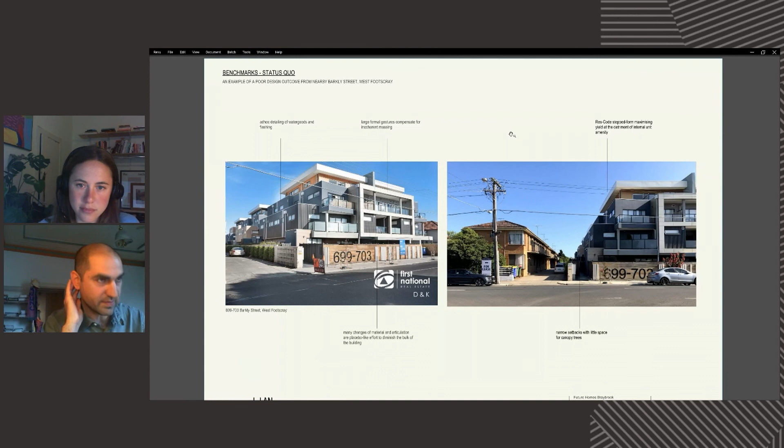And then I guess as we've gone through the planning process, we've really come to a head with that key question of how do you reconcile medium density development within existing suburbs. And we've had a look at benchmarks of how status quo developments get through, and they often result in a stepped back form that complies with ResCode, that maximizes the yield on the site with little space for deep soil zones and potentially compromised interiors, but then also over-reliant on formal gestures to tie the composition together.

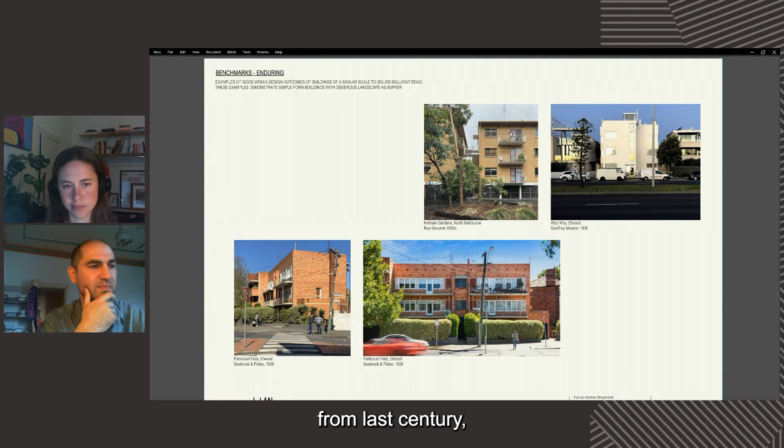So then we've looked at other more enduring examples from last century, which have a more simple form that would be easier to detail and perform better thermally, but then also with larger setbacks, using the landscape to create a buffer rather than a step back gesture.

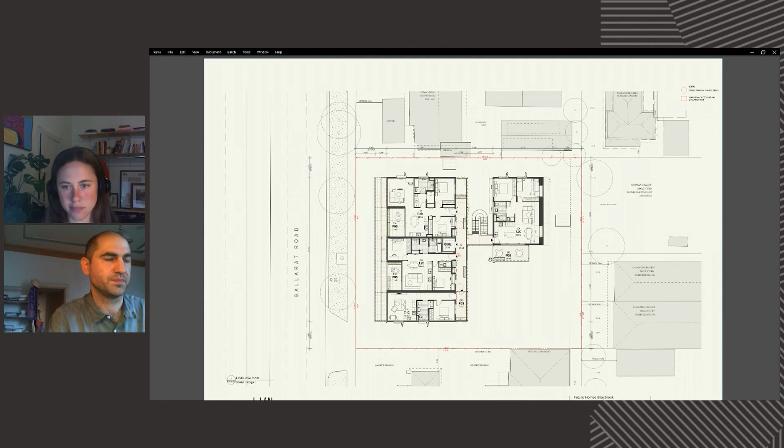And a mix of 1-bedrooms, 3-bedroom. And a really maximised northern frontage with balconies and terraces on the upper level. And this is the scheme as it's currently looking.

So I guess one of the key planning conversations that we've been having is that it's okay, especially on a road like Ballarat Road, which is in such transition, to present as a 3-storey building on its ends and just rely on setbacks with trees as a buffer. And this will hopefully set a good precedent for how development along this street will happen in the future.

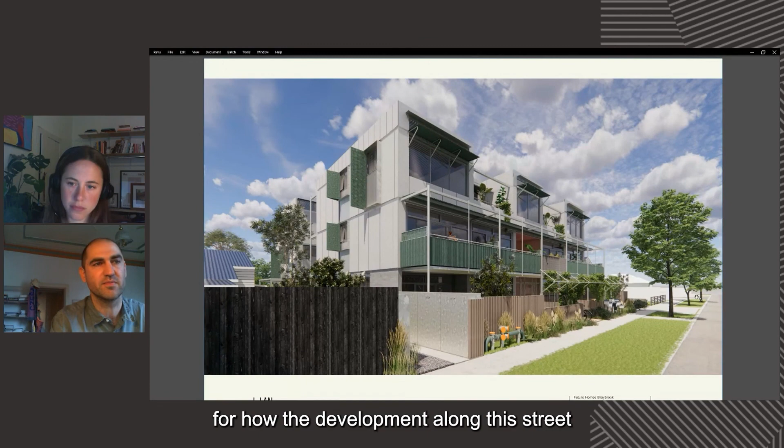And on the east, we're providing windows with shading shutters, and then you get a view into that garden with canopy trees growing between the 2 volumes. And then a view from the car park, which again, we've been working with Open Work and been looking at strategies through the ground treatments to kind of descale the car park and give opportunities for sort of parasitic planting to grow around its edges.

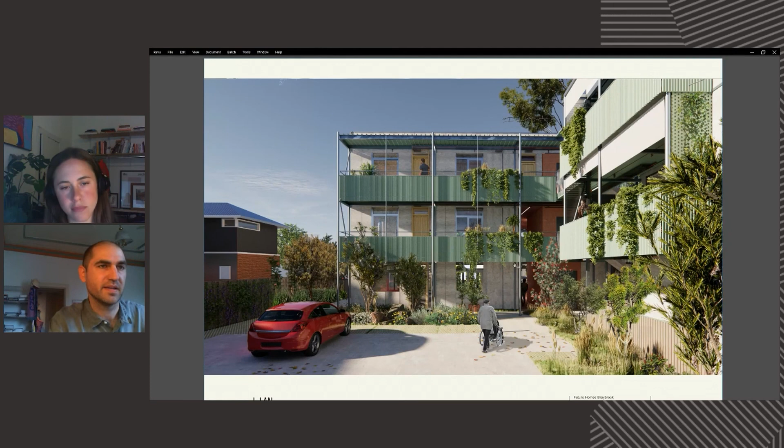Another view looking back through the entry. And we've really made a conscious decision to try and keep all of the circulation open air, so that I guess the public space bleeds through the building. That all-important view from the rear street as well, just showing this integration and sort of descaling of dormer windows through that setback roof at the rear.

That's the view through the entry. Also, part of Open Work's design is an arbor that sort of balances the privacy from also the inside looking out, and also demarcates the entrance through.